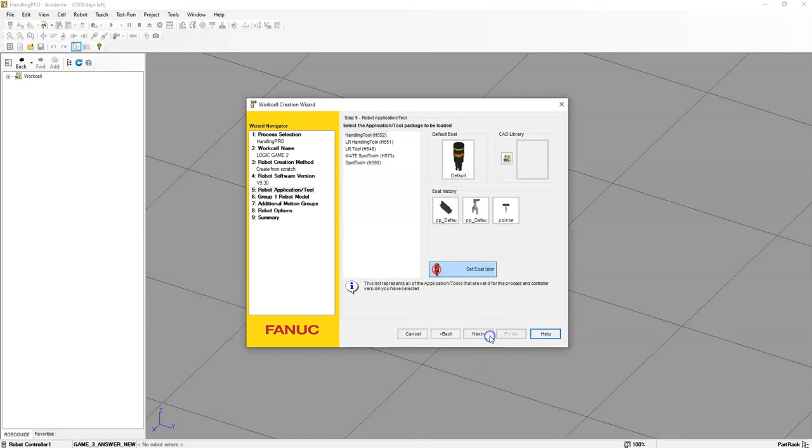So we're going to go to the 3-jaw if it's not already there. We'll go to grippers, find the 3-jaw chuck, and we're going to use the R-2000iC/165F. We're going to continue next, and then finish, and allow this teach pendant to update. The question about flange type, we're going to do standard. So we'll go 1, enter, and allow the cell to initialize.

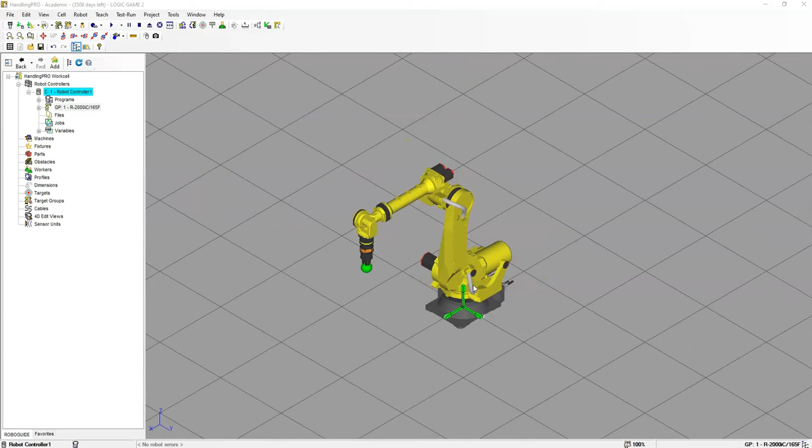Now that the cell is initialized, let's start putting together the cell, and this cell is the same between all the different logic games. The first thing we're going to do is add a plate underneath our robot, so we're going to move our robot up 500 millimeters. We bring her up, and we go Z 500, so we're now 500 off the ground, and we're going to add a robot table to this.

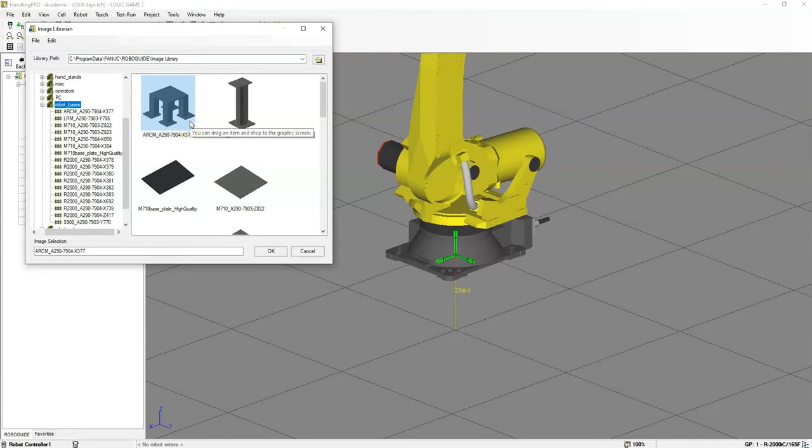So I'm going to go to cell, and we're going to go to obstacle, CAD library, and we're going to go to robot bases, and we're going to use the first one here, which is the A290-7904-X377.

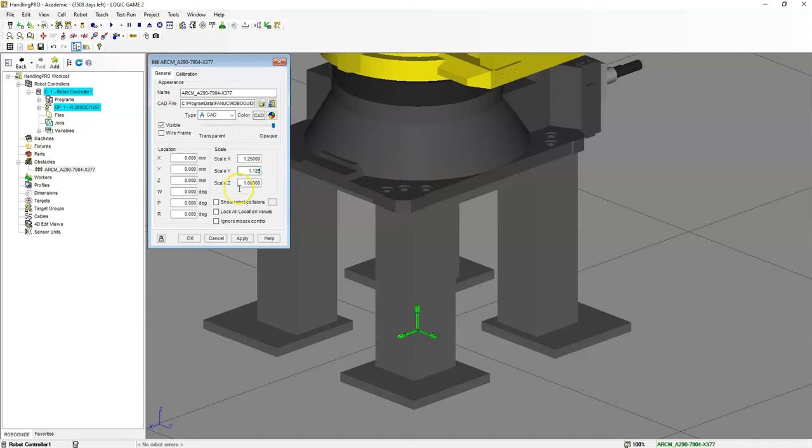We're going to bring it down so that the Z is 0, and we're also going to change the size of this as well. So the size in the X is going to be 1.25, the Y is going to be 1.125, and then the Z is going to be 1. So when I hit apply, it now should fit perfectly on the base with a little bit of extra all the way around. Now that we have this, we're going to lock our location and hit OK.

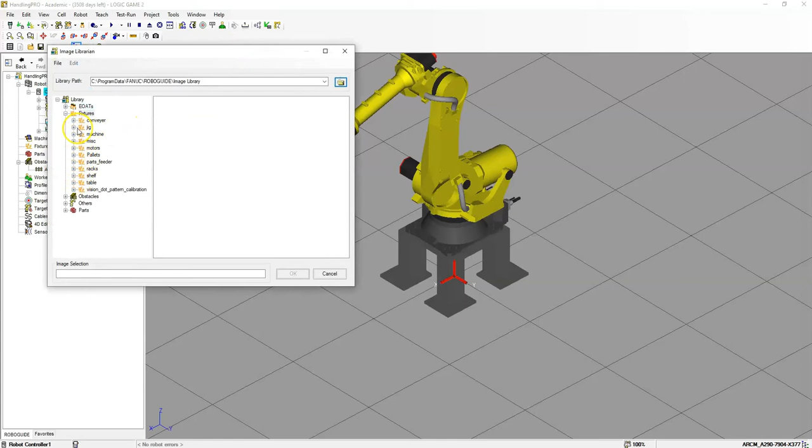Next, let's add the table. So we're going to go cell, and we're going to add fixture, then go CAD library, and we're going to find the tables, and we're going to find the table with legs.

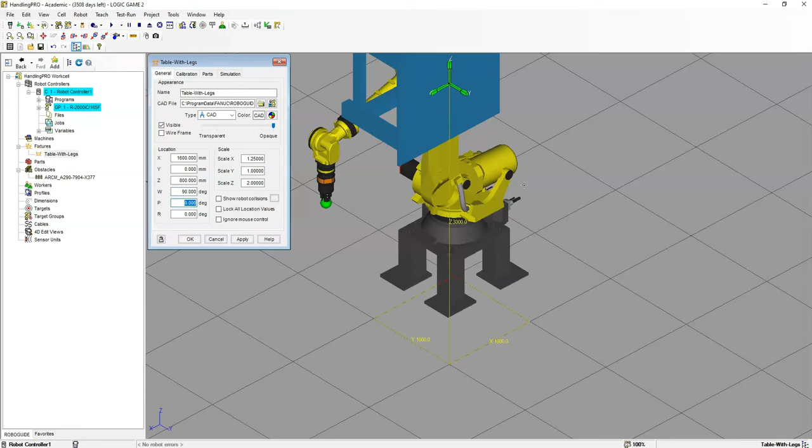And we're going to modify the size so that the X scale is going to be 1.25, the Y is going to remain 1, and the Z is going to be 2. Then the X is going to be 1600, the Y is going to be 0, Z is going to be 800, the W is going to be 90, the P is going to be 0, and then the R is going to be 90 as well. When I hit apply, it should be directly in front, and I'm going to lock the location of this.

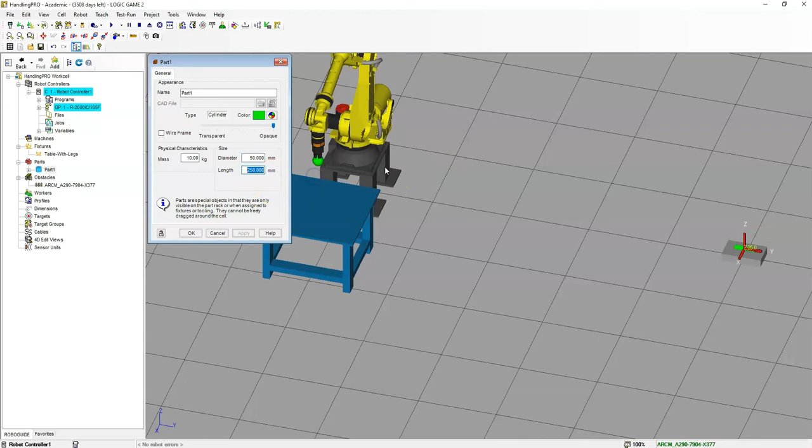Hit OK. Next thing we're going to do is create the part. So we're going to go cell, part, and we're going to create a simple cylinder. We're going to change the size from diameter to 50 and 100, and we're going to have a 2 kilogram mass for this.

Okay, so now that we have the main cell set up, let's now set up our main U tool. So let's double click our 3-jaw chuck. Let's go to U tool, and let's just make sure that the triad is the correct direction, whereas the Z plus is up, Y is to the right, and then X is forward. Let's go edit tool, and let's just double check everything.

Looks like everything is good, so we're at 415 Z, W 180. So if you need to modify that, you can use current triad location and modify these numbers. So let's hit apply on that.

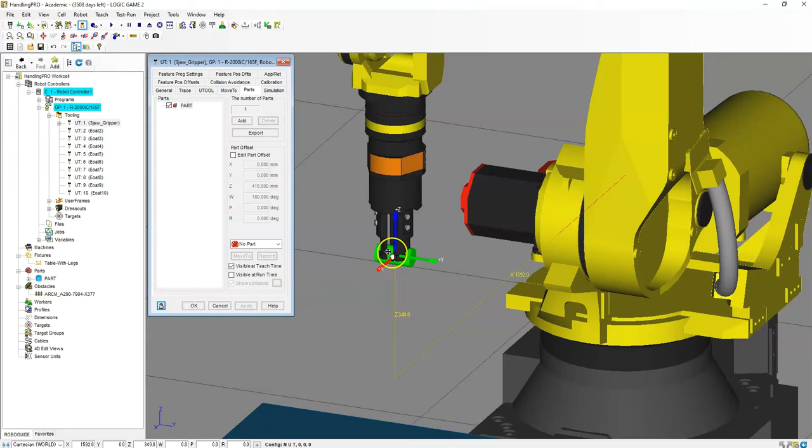Let's go to parts, and we're going to add a part. Let's hit apply on that so we can see our part. Now we need to modify the rotation of this. So we're going to edit part offset, 415, and the W needs to change to, we want to modify so that the triads are the correct direction. Right now it's downwards, so we need to modify this to -90.

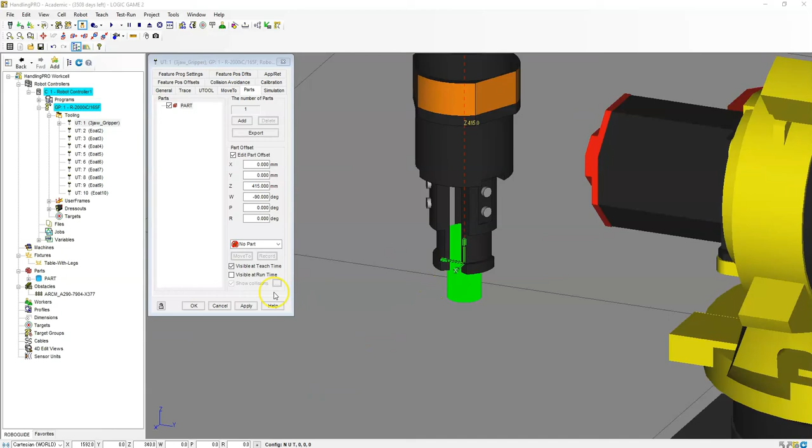And now we have our triad Y positive, and we just want to make sure that these are matching when we add it to the tabletop games scenario. So the Z is going to be to the left, the X is facing forward, and the Y is facing up. So let's hit apply on this. Let's hit OK.

And now we're going to set up the actual jaws. So we'll hit the plus next to the 3-jaw gripper, and let's double click jaw number 1. And we want to make sure that all these match.

It should be 0, 0, 0, 0, negative 90, 0, and those should all be good. We're going to go on the Z-axis. Let's go to the motion. We're going to switch this to device in and out, linear motion, and go speed of 1000, both forward and back. It's going to be a very quick speed, and we're going to be using robot controller number 1, and digital 1 for our opening and closing.

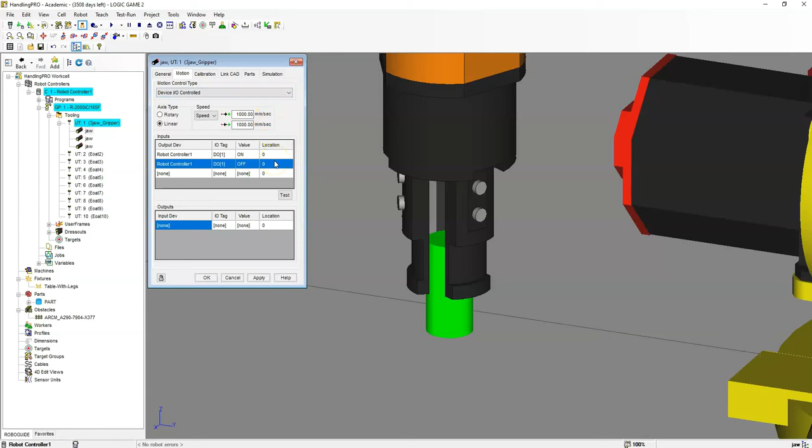Same exact thing, go to the motion, and we're going to do device in and out, linear motion, speed of 1000 millimeters per second. Output device is going to still be the robot controller number 1, so that they all turn on and go at the same time when we call for it.

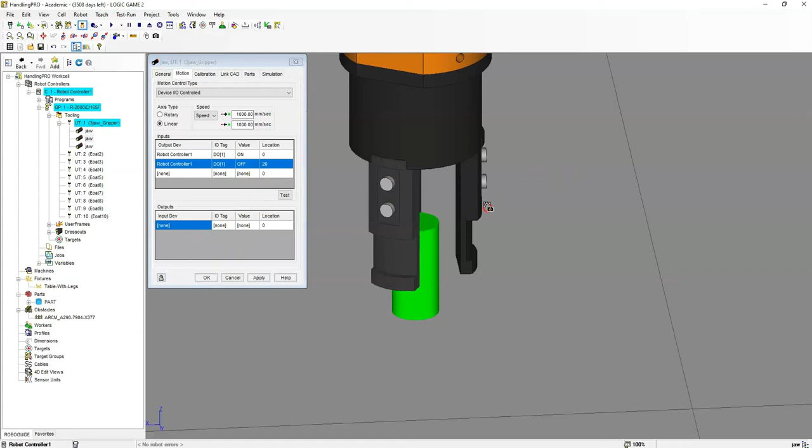There we go, so now that is open. Now we're going to go to the next one. Remember, we do not need to put an input or an output.

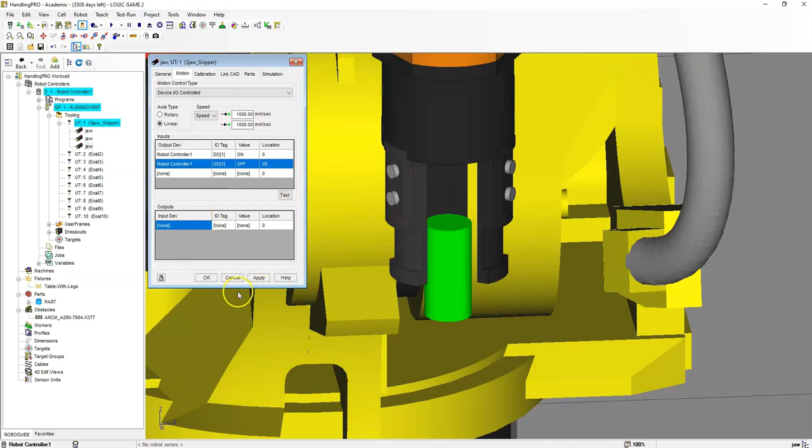Let's go to jaw number 3, and we're going to go device in and out, linear, speed of 1000. Robot controller number 1, and then digital 1, digital 1. One's going to be on, one's going to be off. Off is going to be at 20. We do not need to put an output. So let's hit OK, and everything is now set up for our jaws opening and closing.

Let's create the simulation program for the gripper open and close. So let's go to Teach, Add Simulation Program, and we're going to call this one Gripper Open. When the gripper is open, we're going to utilize digital output number 1, and that's going to mean we're going to be off. So we're going to wait for digital input 2 to be on. So digital 1 off, wait until digital 2. We hit play on that, and it should remain open.

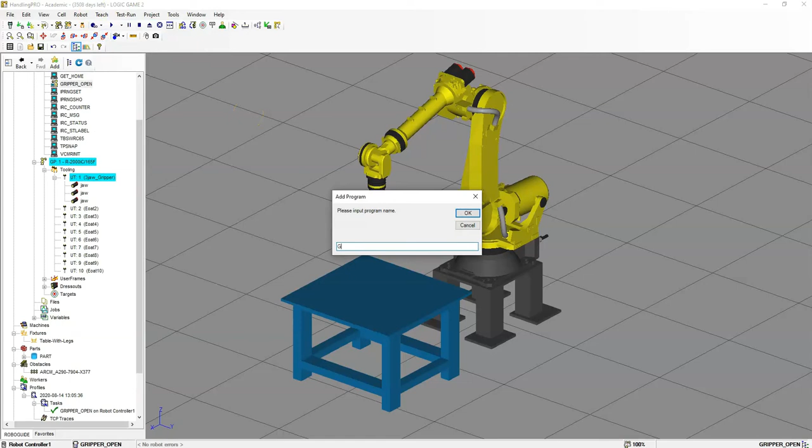Then let's start the close process. We're going to go Teach, Add Simulation Program, and go Gripper Close. Hit OK. We're going to go digital output number 1 to be on, and we're going to wait for digital 1 to be on. When I run this program, it should close. There we go. So now we have our opening and close program to call.

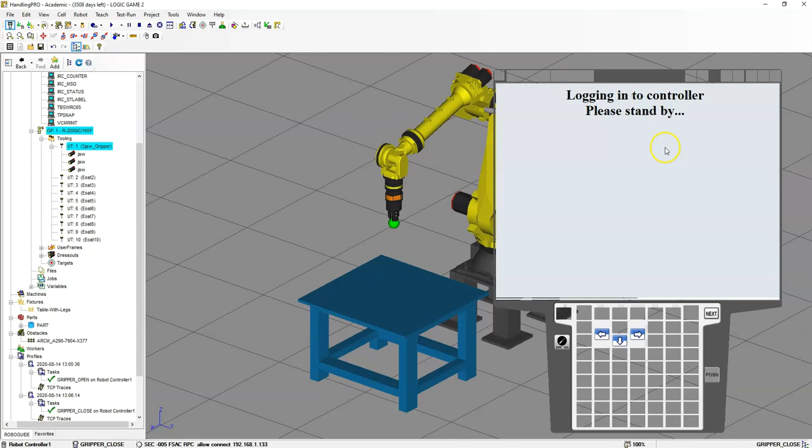Let's turn on Teach Pendant and set up some position registers. I'm going to go to Data, Type, Position Registers. The first one is going to be Home Position. Next one is going to be Safe Position. Third one is going to be Game 1, so this will be the logic game number 1 starting point. Game 1 end. Then we have Game 2 starting point.

So I have my start and end for all 3 games, because this cell is the same startup, it's just the board is a little bit different. Then for position register number 10, we're going to do our tool offset. And then going down to number 12, this is going to be our game offset, so game 1 X, Y offset, or you can just call it offset.

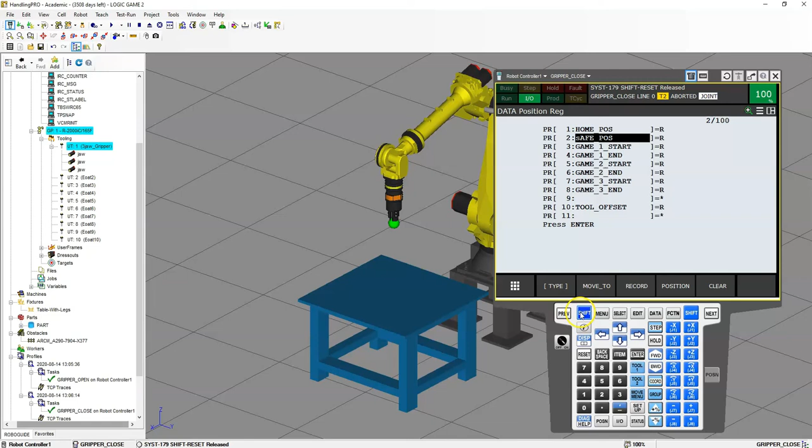For our safe position, it's going to be 0.831, we'll just go 832, 356, 0, 0, and then -90. And if you want, you could just go move to, which will move to our safe position.

Let's go to our tool offset. So go to position, tool offset is going to be 0, 0, 0, 0, 0, 0, and then we're also going to change the Z tool offset to 200.

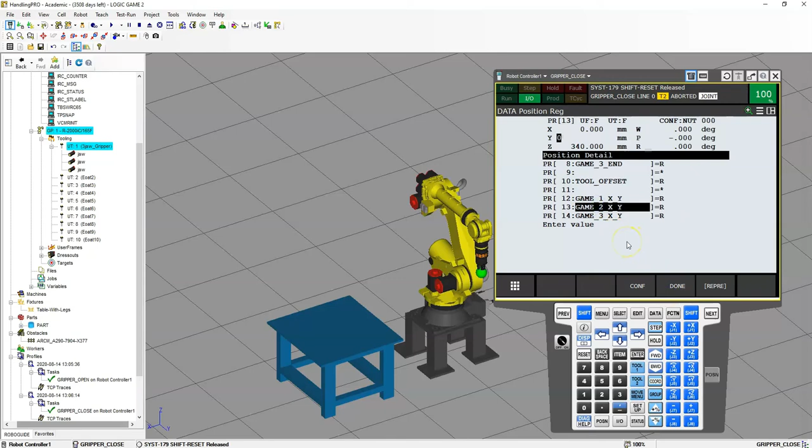And let's go to the game 1 and game 2 offsets. Let's go to position, and let's make that zeros down the board. Let's go to game 2 position, zeros down the board. And game 3 position, zeros down the board.

Go to type, let's go to normal data registers, and here we're going to type in the first one, which is going to be our speed, then we're going to have our column counter, then our row counter, and if we need to, counter number 1 and counter 2.

And speed, we just set to 2000 right away. And the rest will be utilized inside the actual program, so we can leave them as 0.

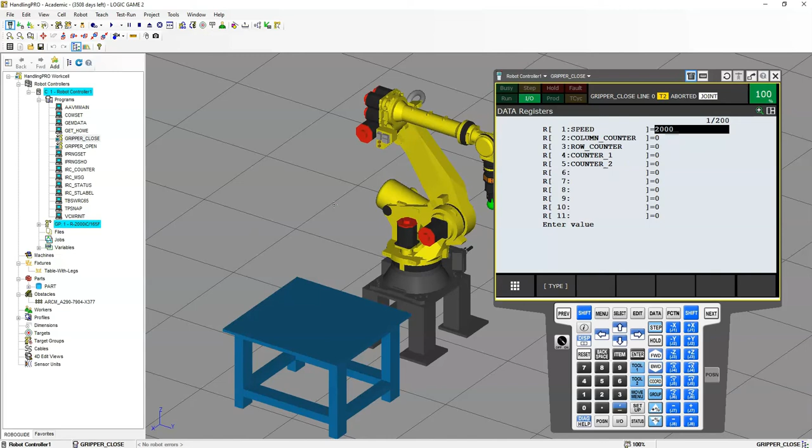So now this is where the two cells are going to kind of start parting. In logic game number 2, logic game number 3, this is where the board is going to be different, and the position registers for the start and end is going to be different as well, along with the programming.

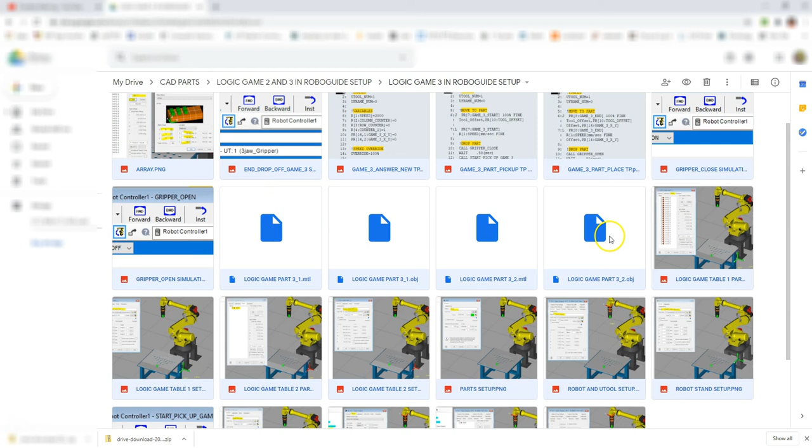All right, let's grab the CAD file. So let's go to the YouTube page, go to the About section, and go under Cell Setup, Logic Game 2 and 3, and there you'll find a folder called Logic Game 3 Cell Setup. Download all these items, which has all the pictures, including the object files for the tabletop, and place them into your folder.

Logic game number 3, I copied it into that folder where all my pieces are for that cell, and I have everything inside that cell, so that's where we're going to pull from. So let's go inside here, and let's bring in the game parts.

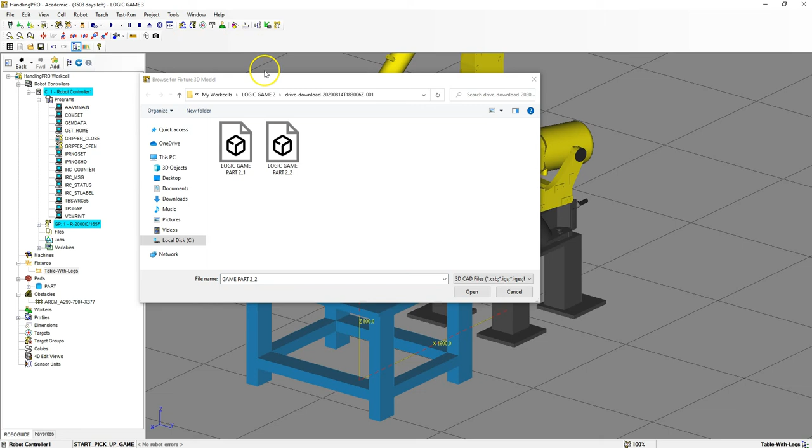Let's go to cell, fixture, and then we're going to go to single CAD, and we're going to go to my work cells, game 3, find that folder, and locate 3.1. Go to general, and then we're going to place the sizes of 1600, 900, 800, 90, and 90. And when I hit apply, it should be right at the bottom here. Lock proportions, and hit OK.

Next, we're going to bring in the top portion. So let's go to Cell, Fixture, Single CAD Library, bring up 3.2, and let's put in the sizes, same as the other one, for the top. Lock proportions, let's add the part.

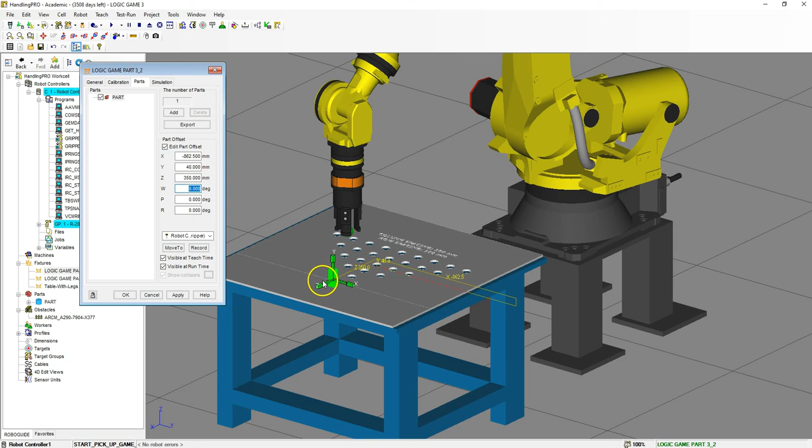So let's go to parts, part, apply, and let's edit the location of this so it's in the correct place. So we're going to go 8, -862.5, 40, 350, 0, 0, 0. So the Z is in the correct direction, X is in the correct direction, and also the Y is in the correct direction. So this is going to be placed here, visible at runtime, so that's good.

Simulation, we're going to allow this to be picked up. Uncheck placed, and we're going to create after 2 seconds from being picked up. So pick up, 2 seconds later, we're going to place.

Hit OK, and now let's go to the main board. So let's go to parts, and let's check this part and hit apply. And this is not going to be visible at runtime, so uncheck that, hit apply. And we're going to go to simulation, click the part, and we're going to allow this to be placed. So click here, and we're not going to destroy this. Hit apply.

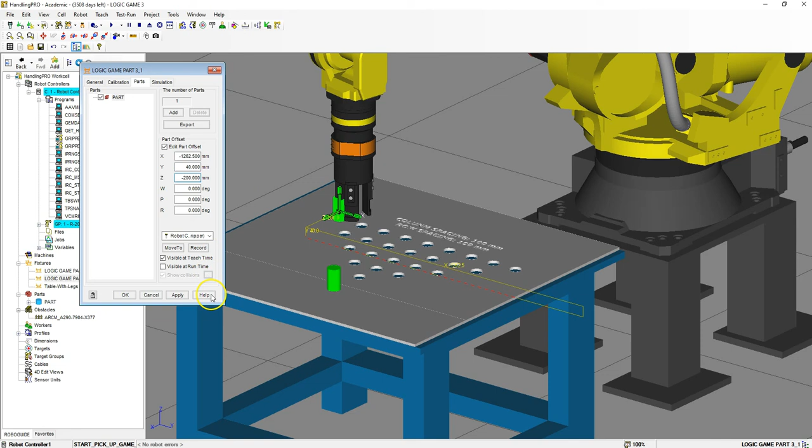Now let's go back and array this. First let's make sure the part's in the correct direction, in the same right place. Go negative 1262.5, 40, and negative 200. It should be in the corner, so that's all good. Hit apply, and let's go add.

The Z direction is forward, the X direction is to the right. So the X direction we need a total of 9 columns, and then the Z direction we need 5. So when we hit OK, with the 100 millimeters, we should have all our correct numbers.

We need to go through and uncheck the ones that we don't need. The last 4 in row 1. So we need 2,1 here, and we don't need 2,3, 2,4, 2,5, and we need 3 now. So 3,1, 3,2, 3,3, and 3,4, 3,5 gets unchecked. And then the last row here, row 4, we're going to uncheck 4,5.

And then on the other side, we're going to go the opposite. So row 5 is all good. Row 6, we need all 4 except the last one. And then row 7, we're going to uncheck the last 2. Row 8, we're going to uncheck the last 3. And row 9, the last row, we're going to uncheck the last 4.

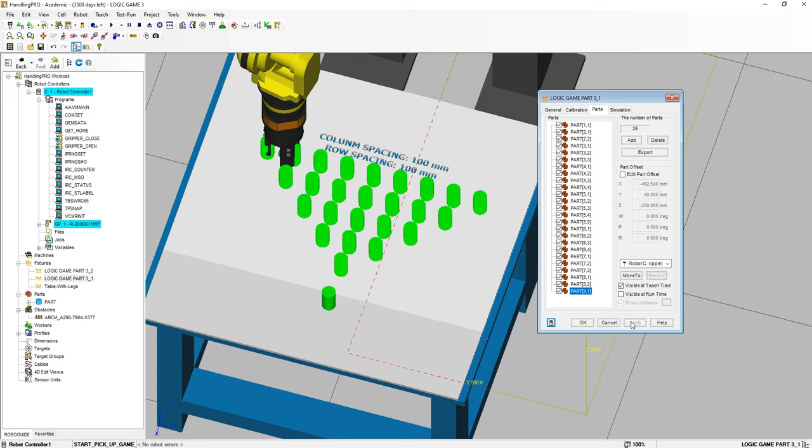And when we hit apply, we should have a triangle. There we go. Hit OK. And we need to set up the position registers for the start and end.

I'm going to go to type, position register, and we're going to go game 3 start. So game 3 starts right here. Double click our starting point. And then under parts, we can go move to, and this is where we're going to go shift record. So now that position is recorded. Let's go to game 3, the end.

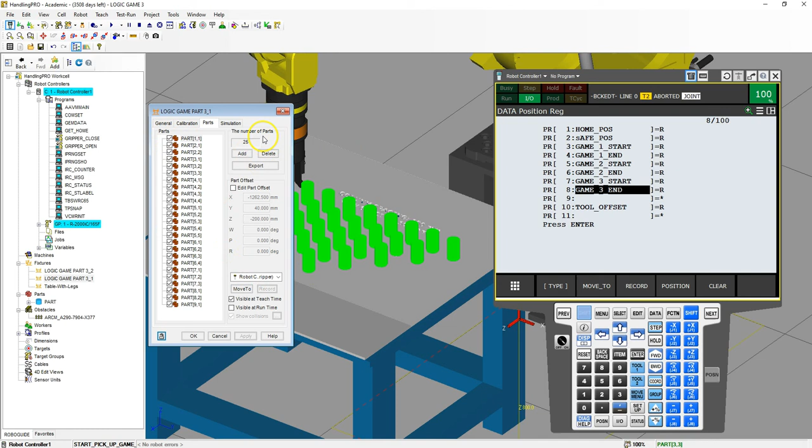Double click our part here. Go to part 1,1. Go move to. And we're now moved to that corner. So we're going to go shift record for our game 3 end.

Hit OK. Let's create our 2 simulation programs before we go to teach pendant. So let's go teach, add simulation program, and this is going to be called our end drop off game 3.

And all we're going to do is go to drop the part from gripper 3 to logic game 3_1, and then part asterisk. Make sure it says asterisk there.

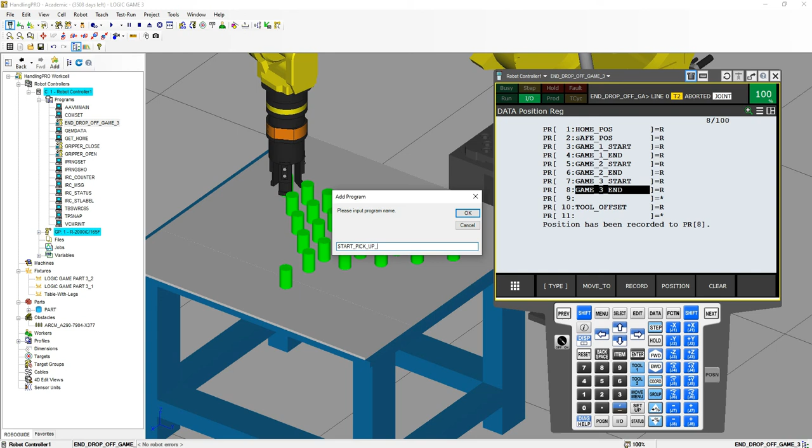Then let's go to teach, add simulation program, and this one is going to be our pickup area. So start game 3. So we have our start pickup game 3. Hit OK. And this one we're going to switch to the pick up.

So we're going to pick up the part from game part number 3.2 and then with the gripper. So now that we have our simulation programs done, then you need to create the teach pendant programs, much like in game 1 and game 2. So inside that folder, you have game 3 part pickup.

So here's the teach pendant for that. So calling out the frames, you're going to move to that position, then you're going to drop off the part or pick up the part. So you're going to call the gripper closed, call start pickup game 3, which we just created. Both those calls are the simulation programs.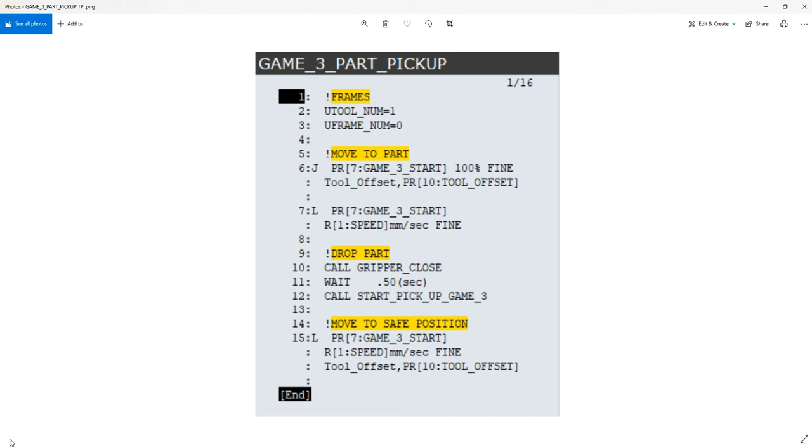And then the final answer. Again, utilize this if you need to. Again, this is not the only way of doing things. Just keep that in mind. So this is game 3 answer.

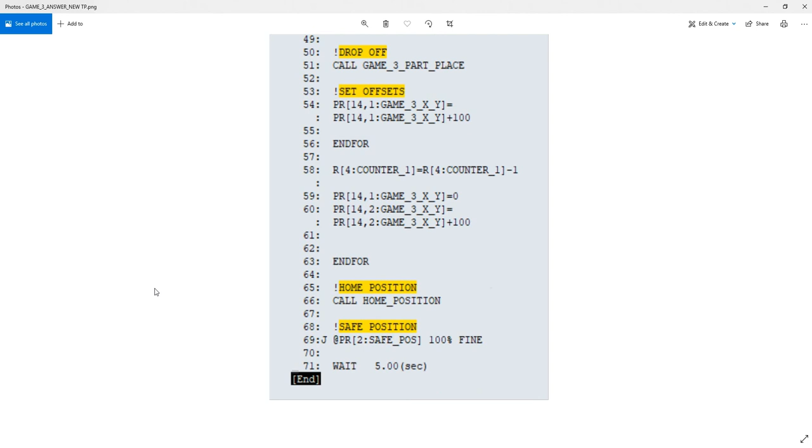This is the way I did it. So I have all my variables, my speed overrides, my home positions and then my loops. So here's my loops, the pickup areas, offset areas, loops, pickup, offsets. And I keep going down all the way to the bottom. Again, you do have this at your disposal if you need help.

And when you're done programming it, you should have the pick and place of the triangle. So good luck.